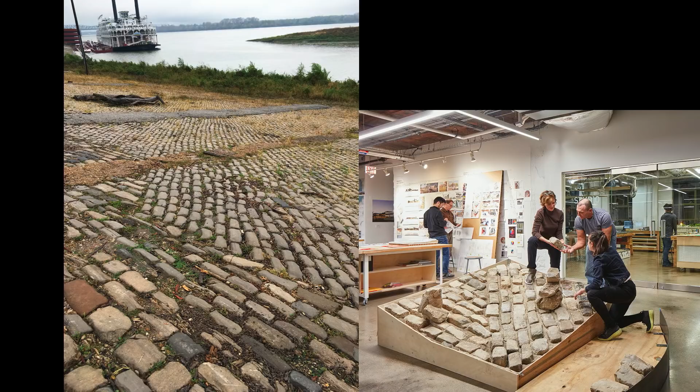Likewise, Jeanne's path-breaking commitment to a socially engaged design practice that strengthens beneficial relations between individuals and communities responds to local challenges, such as Polis Station, an ongoing project exploring how American police stations can be reimagined through an inclusive design process to better serve their communities.

Redesigning public space as an exercise of citizenship and empowerment is also at the core of Studio Gang's contribution to the Venice Biennale, for which hundreds of cobblestones are arriving in Italy from an overlooked but important historic site in Memphis, Tennessee, inspired by the recent removal there of two Confederate statues.

Last but not least, Jeanne's formally innovative high-rise facades should be seen in dialogue with a history of international architecture in Chicago that makes this city the greatest museum of modern architecture in the world. The so-called Chicago frame, which in the 19th century brought us the first 10-story and up buildings, freed the facade as an expanse to be designed with few constraints and hierarchies.

Studio Gang's signature high-rises, down here in Hyde Park, in dialogue with our university's world-class mid-century modernism, have seized creative ways not only to animate a plane, but to occupy a facade, to carve out space on the boundary between inside and outside, private and public, individual and social.

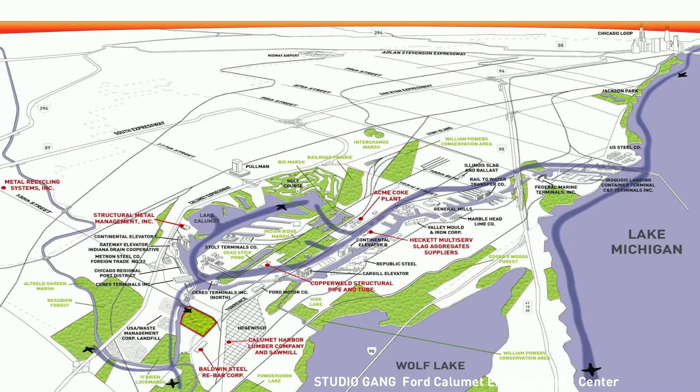With this discovery, we had the perfect ingredients for the project. It would be a building built like a nest, built out of what was available and abundant nearby, using recycled factory steel and other nearby waste products.

For the columns, we thought we could specify steel that was rejected from other job sites and somewhat just available, and figure out a way to accommodate these different sizes and shapes, like wide flange or tubes, in a design process. This is very difficult given the design process we normally use to build buildings.

There was also newly available online data at the time that allowed technology to help us locate lots of steel we could use in this project. It's called Steel Spider - a website that shows you, hey, there's seven 14 by 48 by 18 wide flange beams available.

I think there's something very interesting in the idea of being able to marry used material with new tools that help you match them up - kind of like Match.com for buildings, I guess.

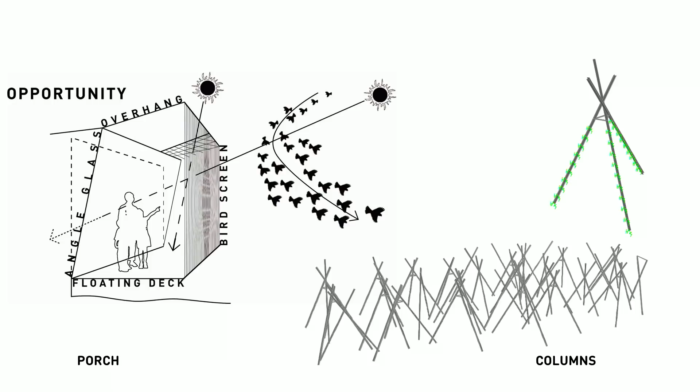We also surveyed, and in this image you can see the concept of these columns - they would actually go down and become the piles for the foundation as well.

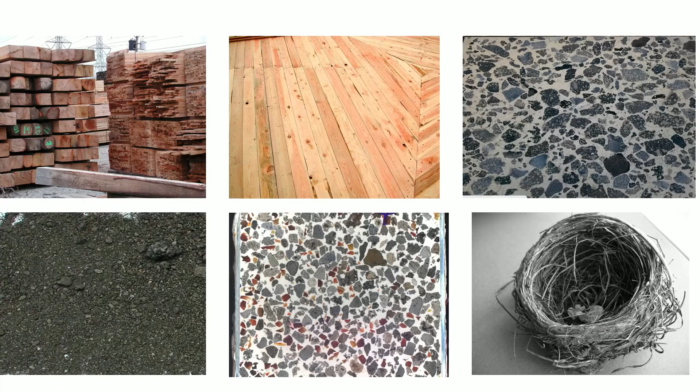We also surveyed a lot of other materials and waste products nearby to incorporate, such as slag and wood from pickle barrels, and we found lots of things that could be used, both passive and advanced environmental systems. Here's some of the materials - that's the test of the slag integrated into the concrete.

So we're using a lot of systems, both passive and advanced, to aim at the highest sustainability rating possible.

So we won this competition in 2004, because it was an example of recycling in a way that could call attention to the physical environment around it - such as the former industry, the watery habitat, and maybe even refer to the lands beyond, like Michigan and Minnesota, where the iron ore came from.

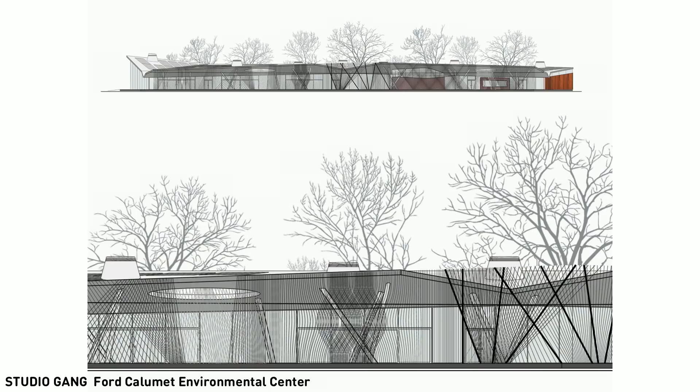When you would experience this building, you would intuitively know that it was part of the place, and it would speak to this important history of Calumet's past, while helping to ensure the future role as a thriving habitat.

To use recycling in this way and make it visible would be a connection to the building and the place. This project was never built, even though we won, but it had such an impact beyond the border of Chicago. It was written about and published widely all over the world, in fact, and I think it had a major influence.

So I want to now talk about a few other projects that use recycling, some contemporary ones by other architects that I think are interesting.

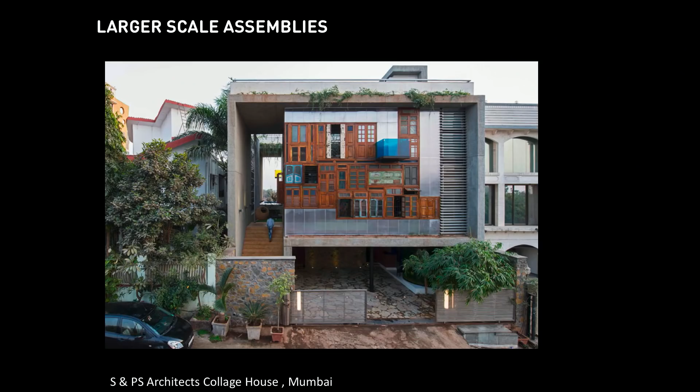This one is a project by S&PS architects. They're young architects in India, and they use salvaged windows and doors, so kind of this middle scale. What I like is it has a feeling of this kind of informal quality of the settlements in India, even though it probably costs much more, but it has this quality that connects it to its place in how it deploys these materials.

Inside, it's actually called the Collage House, and it does have a kind of collage-like quality with operable windows and doors that become natural ventilation, and materials that are probably pretty hard to find nowadays, even though they came from demolished buildings. They set them off with a modern interior.

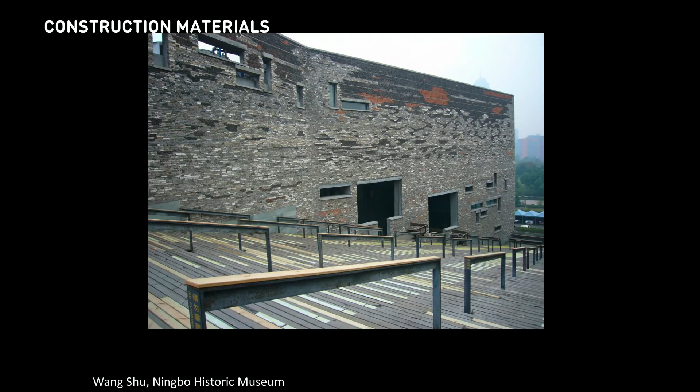This building is really interesting too. It's a museum called the Ningbo Historic Museum by Wang Shu, who was a Pritzker Prize winner in 2012. He used in this building material from 30 villages demolished in China, and used it in the walls in a very beautiful way.

No doubt the people from the 30 villages connect to the new building, but I don't know how they feel. Similar to the Virgin Islands example, this could be equally sad or demoralizing as much as it is poetic. But from an outsider's perspective, it is quite amazing and beautiful. And I wonder if the feelings, the way people relate to these materials, is taken into account.

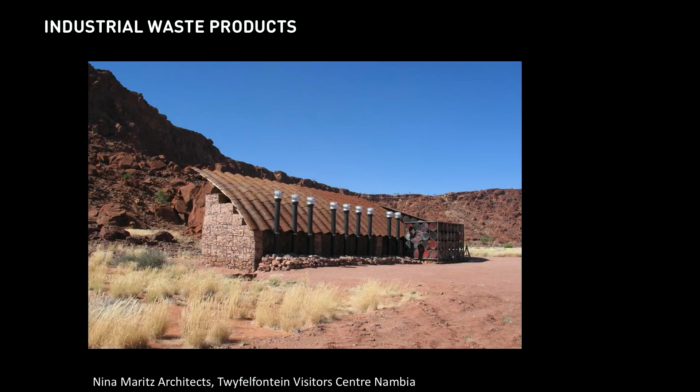This project uses industrial remnants. It's from an architect I met recently, last fall, who's been working in Namibia and South Africa—her name's Nina Maritz. She's been integrating waste into structures, like these oil drums, which become the curved metal tiles, nested to make roof tiles. The project's called Twyfelfontein Visitor Center.

You can see there's a playful, uninhibited use of these materials, working with local craftspeople to make the parts of the buildings. The other thing this architect does is actually accumulate materials—almost like a hoarding mentality—in order to make recycling possible.

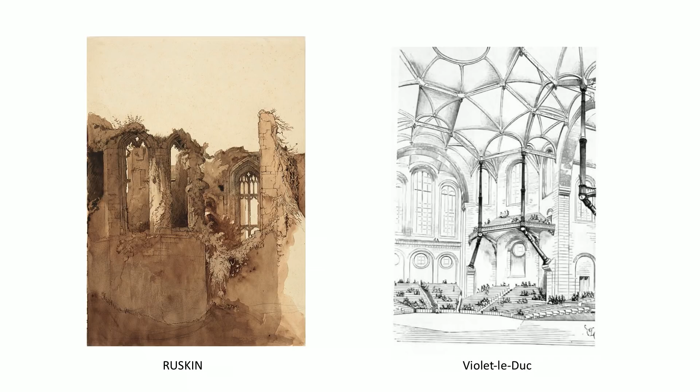There was an exhibit at one of the Biennales in 2010 by OMA and Rem Koolhaas, called Cronocaos, which dealt with the struggle between preservation and restoration that is ongoing. He accuses the preservation movement of striving to preserve larger and larger territories while simultaneously abandoning the preservation of post-war architecture, especially social architecture like housing projects. He sees this hypocrisy reflected in the present day.

He said preservation and modernity are not opposites. Preservation was invented as part of a groundswell of modern innovation between the French Revolution and the Industrial Revolution in England. In a maelstrom of change, it's crucial to decide what will stay the same.

In reality, I think the preservation and restoration attitudes have evolved since Ruskin and Viollet-le-Duc, with new understandings about these things, in addition to new parameters like sustainability and new conflicts that have come up.

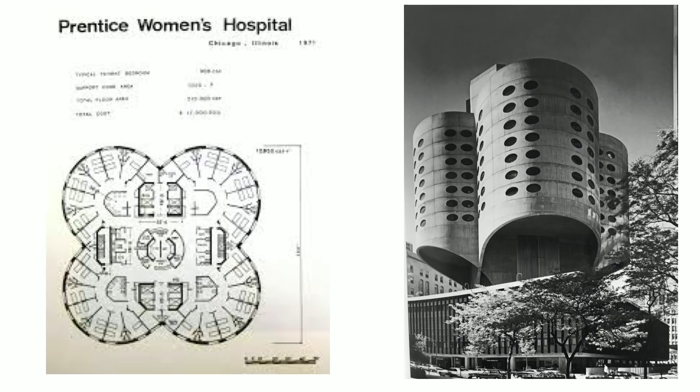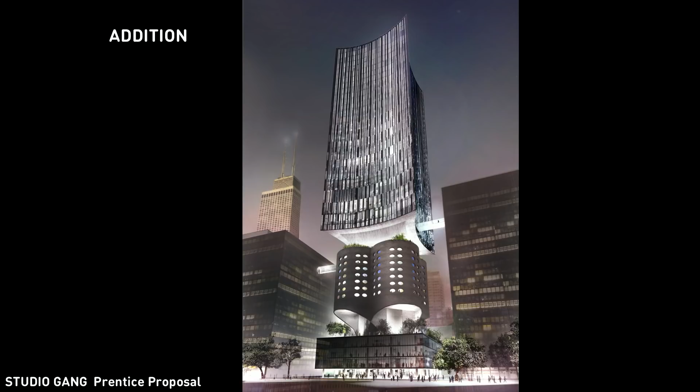This interesting thing about the building is it does not have a central elevator core, so it has a column there, but the middle is quite open. So we came up with what I call the stack solution, based on a programming app that's about stacking these things. The idea is that the formal language of this building already suggested that something else should go on top of it.

You can see the podium, we kept the same. The lobed building, the four petals, we kept the same. And then we kind of skewered it with a core that was structurally sound. We even worked with an engineer, Magnusson Klemencic, to figure this out, and then put all of the program they wanted in this building above it. It's interesting that the basic strategy was already there in the initial building, and by adding this core, we were able to give them everything they could possibly desire.

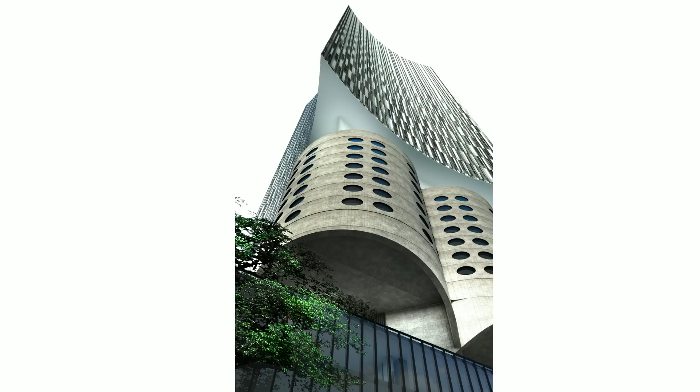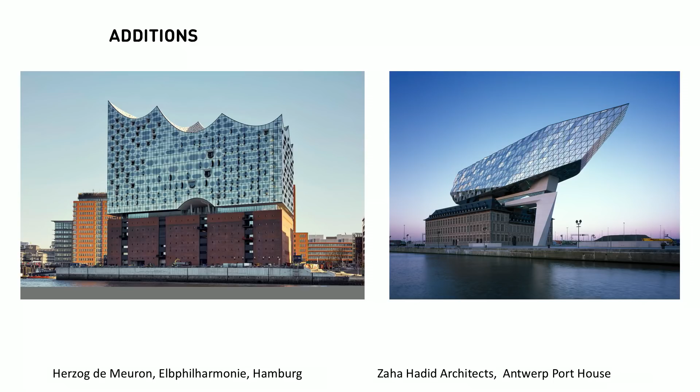This building shows there's a contradiction between what Northwestern wanted, a brand new building, and this kind of age value I mentioned before. At Prentice, we could basically get both, the new bling and the old, so I thought that was cool. But there are some other examples out there right now. This is Herzog de Meuron's Elbphilharmonie in Hamburg, built on top of a storage building, a totally new use and totally different architecture with an interesting contrast. On the right is Zaha Hadid Architects' Antwerp Port House, which really takes a different approach to the original for sure.

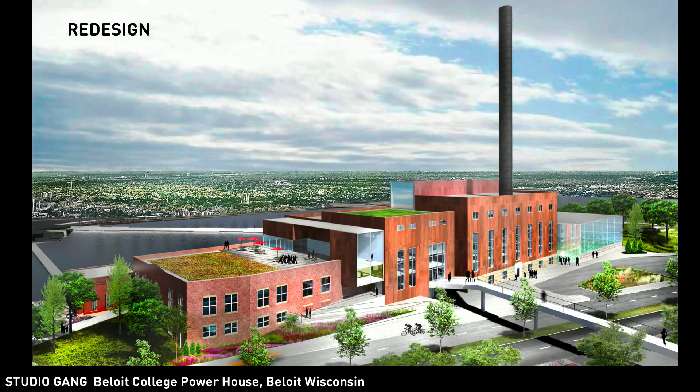But to achieve the historic building credits, the financial instruments you need, we were asked to put the insulation on the inside, keep some of the old leaky windows, and not have the roof terrace visible from any vantage point of the building. Because we want this building to happen, we actually took that on. Up in the corner on the left is a redesign that's kind of where we were going, and the way this ended up going was more like addition, not on top, but on the side. So it's still a beautiful project, but it points to this very difficult problem between sustainability and historic preservation.

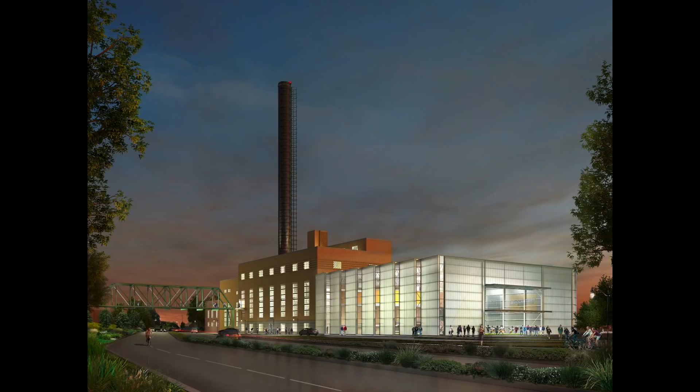It still looks pretty nice though. This is the addition of the big open space, which will be a place for lacrosse and other sports inside there. Another really cool project by Thomas Heatherwick that just recently opened is using subtraction on one of these industrial buildings.

So it turned from a grain silo to an art museum, and you can see how the building has been carved away to make a dynamic space in the middle.

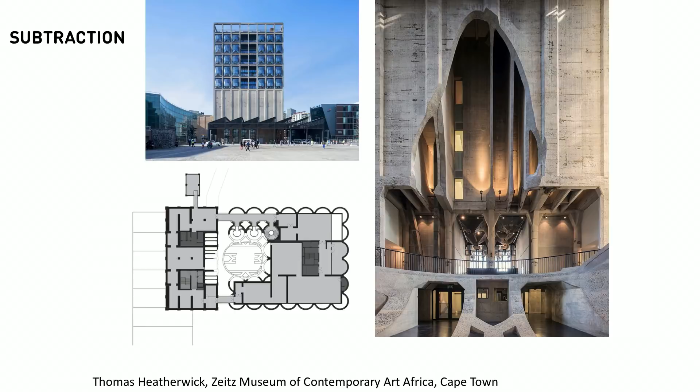Italians have been dealing with reuse for so long with many of their structures that they invented a lot of ways to distinguish between the old and the new. So another approach to adaptive reuse is to make it clear what's old and what's new. This goes back to theories by Camillo Boito in the 19th century, who outlined the approach. But it's not surprising to see this.

This is one of the most exciting buildings I think, as an adaptive reuse, that I saw as a student, and I've gone back to it several times. This master of reuse, old and new, is Carlo Scarpa, an Italian architect. He did this design for Castelvecchio, which is kind of the standard, I guess you would say.

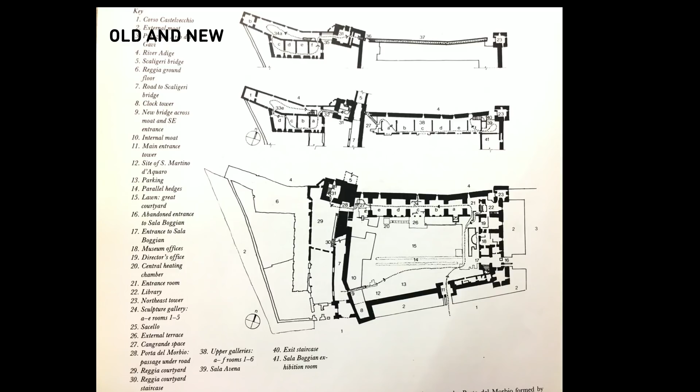So what I'm going to show you is in the knuckle there, where it's dark black. That is one of the most complex spaces that I've ever seen. It is a place that holds this sculpture called the Cangrande. And there's so much interesting design thought that went into how to display this sculpture, how to highlight it from the old and the new, and how to move people around it from every vantage point, that it's so utterly contemporary or modern in its sensibility.

Finally, reduce is the last one of the 3 R's, and I think it gets the least attention. It's obvious that reduce would have the biggest impact on waste and reducing the amount of stuff we have. Before we were looking at that kitchen with all the kitchen cabinets in it to store things - today we have entire buildings to store things. It doesn't seem like we're going in the right direction.

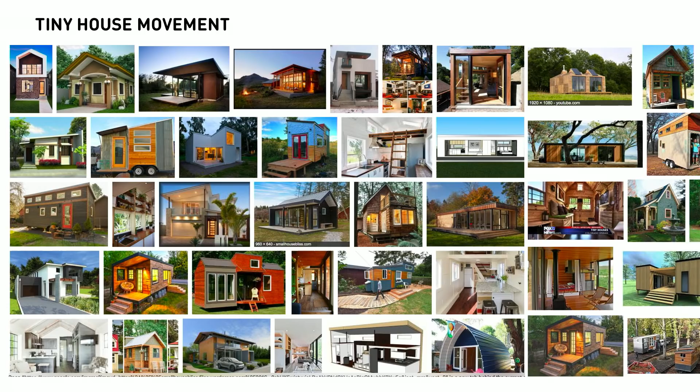So the closest thing you can think of, I guess there's a couple parts. One is this tiny house movement - I don't know if you've heard about it, but there are so many people trying to do the tiny house. I want more design architects to try it. A lot of people are doing it themselves, and it's a very interesting phenomena, to just live in under 500 square feet. It's probably why you get those storage buildings, actually - I just thought of that.

So then there's micro apartments - this is nArchitects, who built the first one in Brooklyn. These are very small apartments, very nice, but a response to a crushing need for housing in most major cities. This is really happening everywhere - we're doing one as well in Denver. There's a lot of innovation around how to make a small apartment really accommodating.

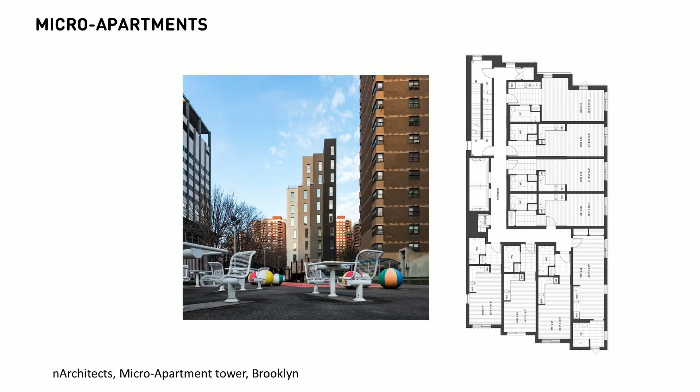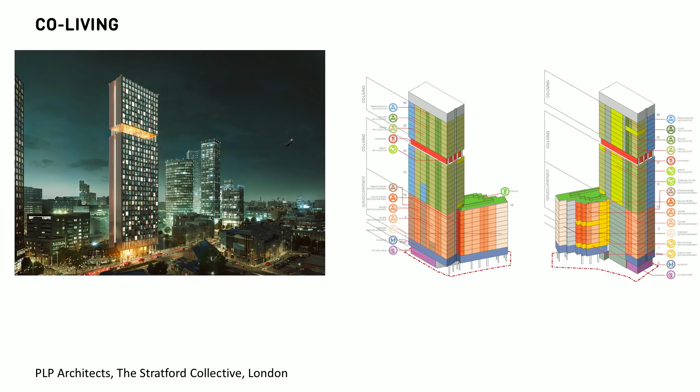Then there is the co-living movement, which is represented here by a tall building by PLP Architects in London. This really has to do with the idea that millennials don't want to buy homes anymore, and they think of living more as a service.

So there's new businesses popping up, like one called The Collective, and if you know WeWork, there's now going to be We Live. The founder of The Collective once said, we will all be homeless someday, and I think that's the goal. It's like we can move into these different environments and share parts of the building, reducing the footprint for every single person, but also getting a social environment at the same time.

So finally, I just want to show a project that we did along these lines, for Cicero, Illinois, a suburb of Chicago, which was shown at the Museum of Modern Art. This project really was taking a look at what we could do given the foreclosure crisis. This was in 2010, and we decided to look at a suburban environment and wonder if the foreclosure crisis could provide some opportunity to rethink the way that we live and work.

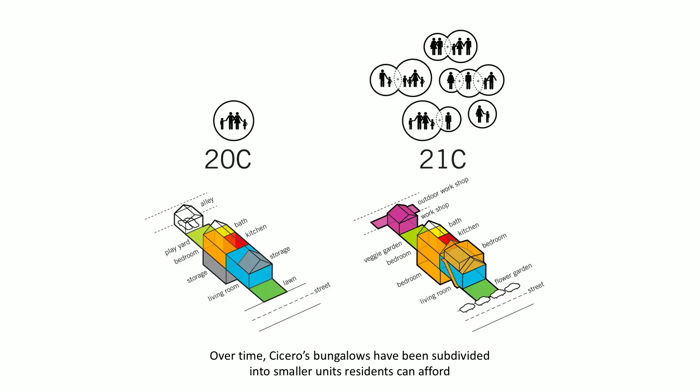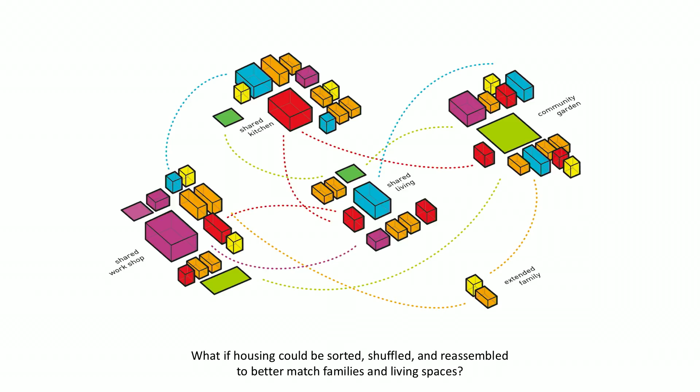So we said, what if we could take these different uses and, instead of being confined in the bungalow envelope, reshuffle them and reassemble them to better match these contemporary families and living spaces. So our model we came up with is, what if we had a building that you could grow and expand?

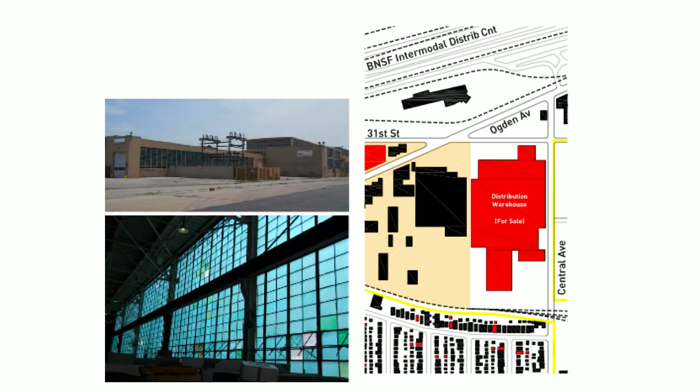You could have as minimal amount of bedrooms as you needed, and you could share other places like the kitchens and dining with other people, utilizing this abandoned factory network.

So kind of reusing these buildings, reinventing them - we took one example of a factory and tried to show how the units could be placed in there.

So these units - you would own your own unit, but not the land that it would sit on, so you still have this invested equity. There was a whole complete concept of how to do this from an economic standpoint.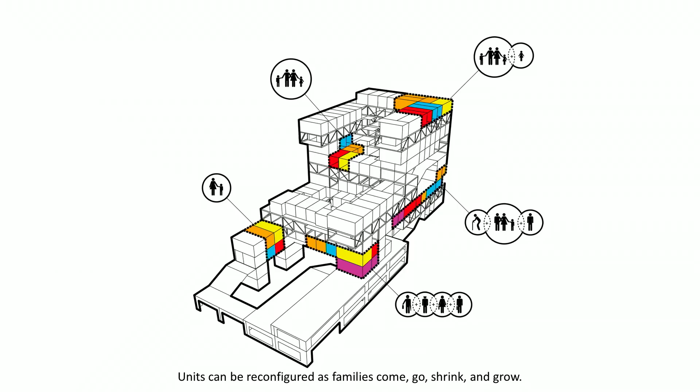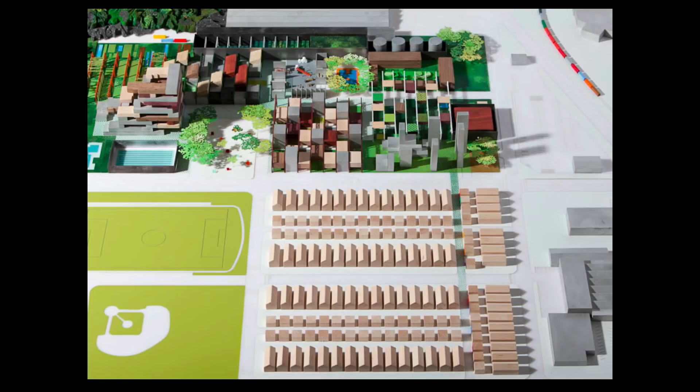And it would be this higher density growing out of the infrastructure of the factory. So instead of being divided into a neighborhood that has residential here, factories there, and recreation there, you would get this completely combined fabric, which you see at the upper part of the slide - the reinvented factories, live-work space, an economy that would accommodate materials and uses, tied into the existing network of alleys, which is where a lot of the cool stuff was happening.

So just to wrap up this first material world talk, I think we could point to a couple of challenges to summarize the arguments I was starting to make today. One is that recycling is not a totally perfect solution to everything.

There's always going to be the question about this harvesting of the materials. Where did they come from? What happens to the site where the materials are taken from? And today there's also this question of toxicity of the materials - are they safe?

It's a lengthy process, and then there's barriers to this from both society and economics. For example, it takes more work to prepare these materials for recycling. So labor, in our current system, because we pay tax on labor and not on resource use, it disadvantages this idea of using more work to prepare materials for recycling.